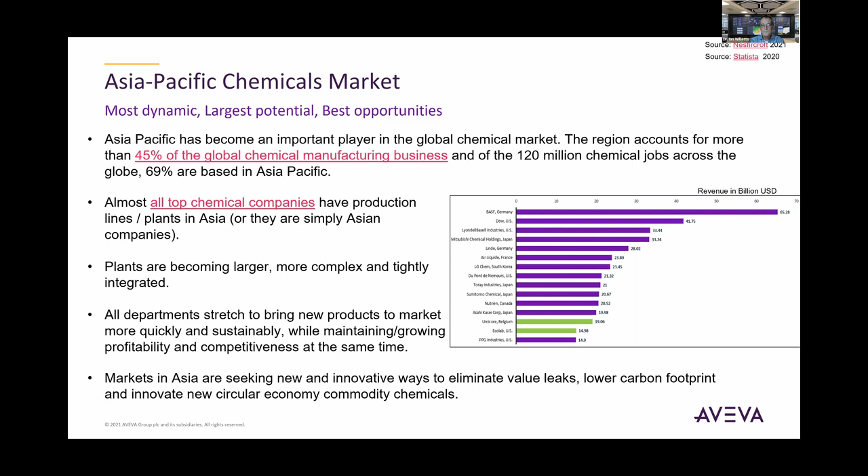If we look at how the industry is responding to climate change and to the need for more reusable and cleaner chemicals, we see three major transitions happening at the same time: first, the circular economy drivers; second, the energy transition; and third, a large workforce transition. I'm going to use these three themes during this presentation to highlight some of the important ways the industry will be changing in the coming years, and the different technologies that can be applied.

Based on different industry analyst papers, an interesting statistic on this slide is that some analysts estimate that by 2050, nearly 60% of plastics production could be based on reuse and recycling. I attended a similar webinar recently given by Covestro,

which is one of the major polymer manufacturers. The person speaking at the time said that we've had 70 years for the core commodity chemicals that are used today across industry. Those processes were invented 70 years ago, and over the last 70 years we've fine-tuned and optimized them. But we're now in a position with the circular economy that we have to invent new commodity chemicals and bring those to market in a fraction of the time we've had to fine-tune our existing commodity chemicals. So the industry is doing a lot of research and development at the moment, innovating new polymers, new chemicals, new circular economy chemicals.

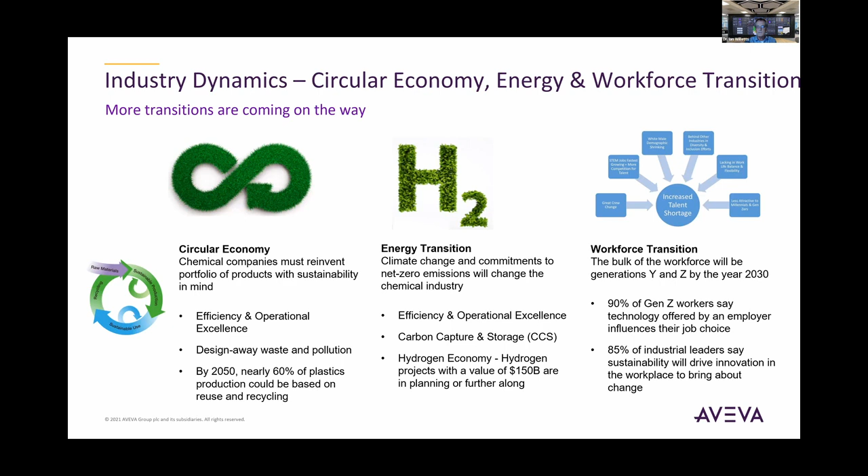So in terms of addressing those three industry challenges, I think there are four areas where we will see a large amount of drive from the industry. Obviously, one is sustainability, and that is meeting the climate challenge.

If we're going to spend $500 billion, or even $1 trillion, we need to make sure that those capital projects get executed a lot more efficiently than they have been in the past. We need to drive engineering productivity. We need to take the workforce we have today, that is always challenged to do more with less, and dramatically improve engineering productivity. And then we need to address the workforce transition.

So in terms of that, perhaps I'll quickly focus in on capital project efficiency and engineering productivity, since I've already mentioned workforce transition and sustainability.

If we look at the execution of capital projects in the past, on average there is a 30 to 40% average schedule and budget overrun on capital projects. Now if you do a quick 30 to 40% calculation on $1 trillion, you don't need to be a math wizard to figure out that that's hundreds of billions of dollars. So we need to drive capital project efficiency and look for ways to do that.

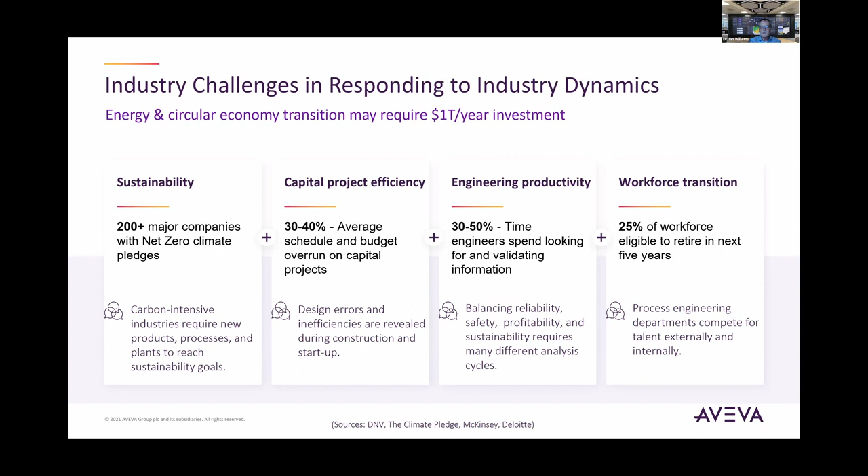And that is combined with the digital twin - those technologies come together with the digital twin, and I'm going to say a little bit more about the digital twin shortly. So Industry 4.0 plus the digital twin is driving digital transformation. Just so we're all on the same page, digital transformation is the confluence of tools, work processes, and people, bringing those three circles together to drive improved productivity, project capital efficiency, workforce transition, and new sustainable technologies that will improve the world.

So in terms of the 4 pillars I've focused on so far, if we work smarter with digital transformation, we can design and implement the sustainable plants of the future, whether it's oil and gas or chemicals.

For sustainability, if we do this right as an industry, if we step up to the plate and implement technology so we can calculate the carbon footprint and environmental impact of a new design, we can make sure that design is as efficient as possible - driving change by not just looking at energy efficiency, but also environmental footprint. So we can achieve a 20% reduction in materials wastage and a 30% improvement in real-time collaboration on sustainable processes.

For capital project efficiency, making sure we use the digital twin and a simulation model early on in the project lifecycle can have a dramatic impact on the final completion of a capital project. The earlier we identify design issues and challenges, the cheaper it is to actually make corrections to those mistakes.

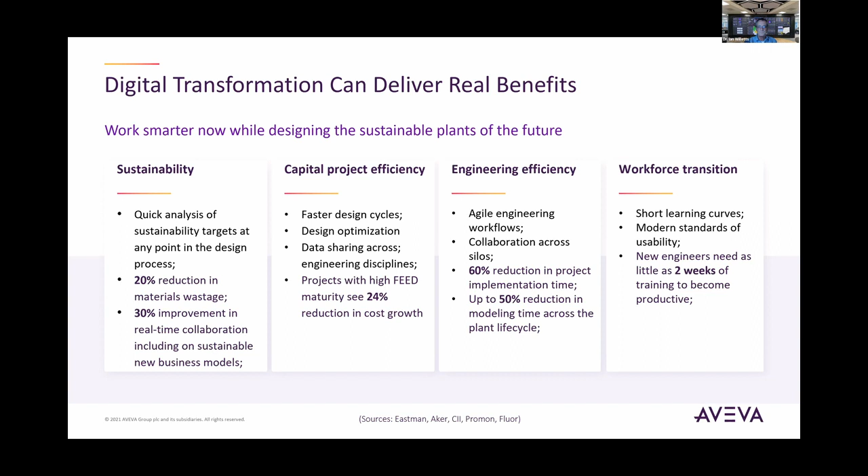So how is AVEVA bringing value to the table? What are the different technologies that we're rolling out in response to this drive on the part of our customers for digital transformation?

I just want to make sure we're all on the same page when the term digital twin is used frequently by many different people. As a term, it means different things to different people. So I want to give you the perspective that when we talk about the digital twin at AVEVA, we look at it from three pillars.

If we actually look, there is the plant digital twin, which is the process data - all of the data sources, whether it's existing data coming from a PI historian, or the actual design data coming from a new capital project. That data represents what the plant is doing today: how was it designed, what is the valve size, what is the pipe length, etc.

There is also the simulation, the process digital twin, which is the model of the process. This is a first principles or a data-based model that gives the cause and effect relationships on how the plant will behave once built and designed. And then the third pillar is all around visualizing or accessing the data.

So it's essentially, how do you visualize the data in the plant and also the results? And how do you derive insight and knowledge from the process digital twin and make that information available to the connected worker? So collaboration, learning, and guidance is all pulled together by the digital twin.

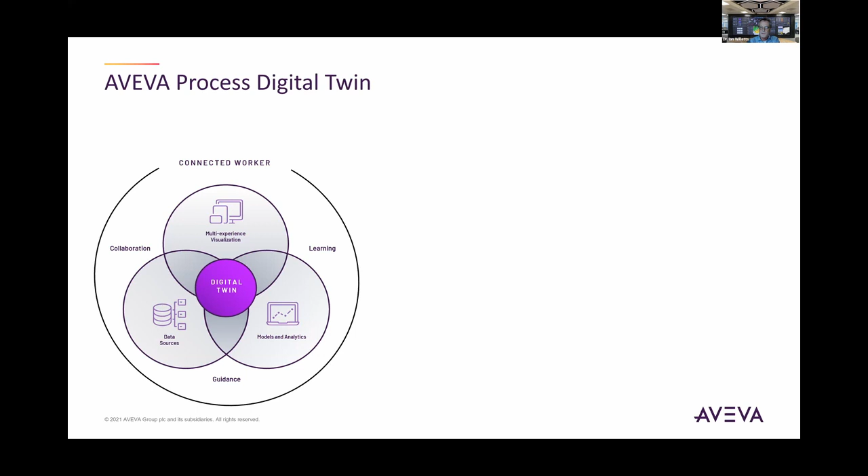Today we're going to be talking about the process digital twin, which at AVEVA we look at from two angles: there are physics-driven models, or first principles models, and then data-driven or empirical AI models. We're tackling this from many different aspects.

There are steady state models, dynamic models, models for the pipelines, the utilities, planning and scheduling models, online models for performance monitoring and real-time optimization. These can be combined with neural net models, AI models, deep reinforcement learning, etc., to combine the best of both worlds and make sure we have the best possible model representation of a process. And that is all geared towards driving digital transformation.

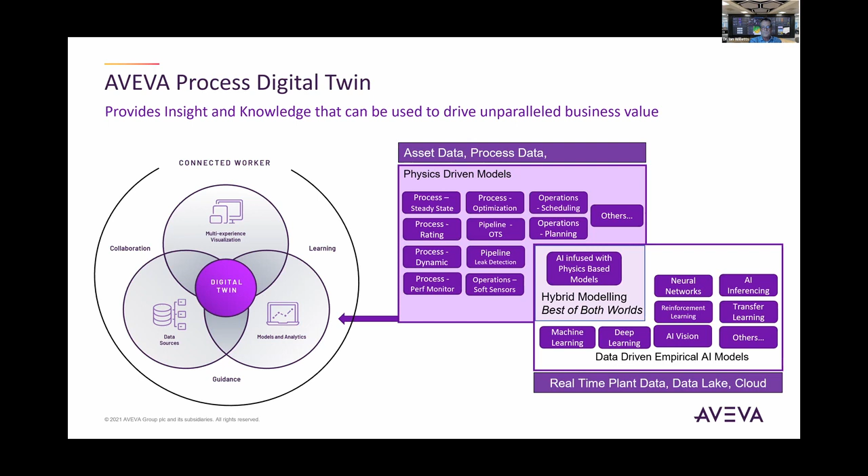So the way that we've tackled this at AVEVA is that we've taken a step back. We are an established simulation company. We've been in business delivering simulation software to companies for 50 years. But we took a step back and we looked at the chemical industry.

We looked at the energy transition that's going to go on as part of a response to climate change. And we've designed a new platform from the ground up that is using the very latest technologies. This platform is called AVEVA Process Simulation. It has been designed from the ground up to be multi-core, cloud ready, with a role-based user interface, and completely open, scalable, and customizable to your particular process.

So we wrote the code from scratch. This is not a rework of an existing product. And it's been designed to deliver the process digital twin for the chemical industry and the renewables world. And it runs in different run modes: design, rating, and dynamic mode.

There are multiple libraries for process intensification, for environmental impact, for economic impact. It is completely AI enabled, and we can have one single process model for the entire asset life cycle across all the different engineering disciplines involved in a capital project.

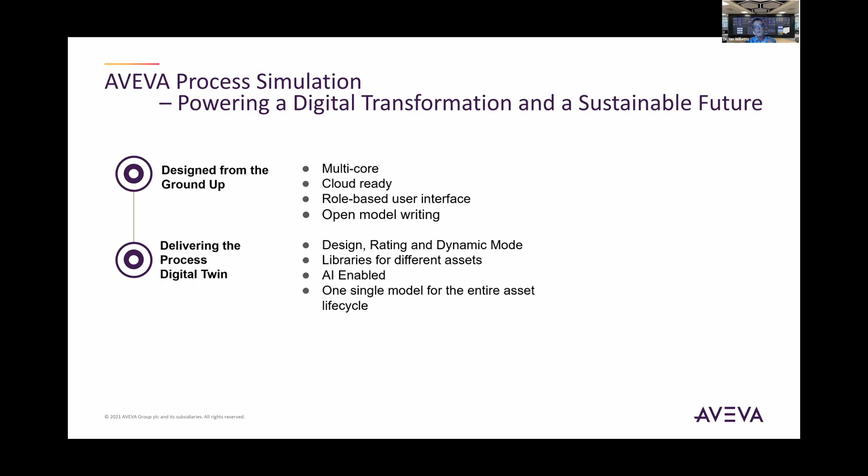And most importantly, it's been designed to be used by the next generation of process engineers, the so-called Gen X, Gen Y, and I think we're even up to Gen Z now. So it's got groundbreaking ease of use, instantaneous results, an intuitive user interface. It's ready to meet the demands of the chemical industry, and it's ready to future-proof the environment with sustainable solutions. And most importantly, easy to learn and use.

At some recent work done at Cal Poly Pomona in California, the professor presented and ran through some coursework with 3 different simulators, 2 established simulators and AVEVA Process Simulation, challenged the students to do some coursework, and then got feedback on those 3 different simulators. Of the class size of 33, 31 out of 33 reported back that AVEVA Process Simulation was completely better, completely new, a much better environment for doing their process engineering calculations. So that was a very positive reinforcement from a local university and from our next generation of workforce.

So to keep this moving, I'm not going to spend too much time on some of these individual features, but we have this new AVEVA Process Simulation, a next generation solution that builds upon what I just said about being designed from the ground up for the next generation of workers.

A key part of today's presentation is around sustainability, and I will play a video that shows some of the capabilities of AVEVA Process Simulation and how it can be used to drive a more sustainable future. Hopefully the sound will come across - we tested this before the meeting, so I'm confident it will work.

This is an example of a cumene production process that's included as a standard example with AVEVA Process Simulation. As you can see, it's a complex process with many waste, utility, product, and raw material streams. Because of that, it's a great example of the type of process we'd want to calculate sustainability metrics for.

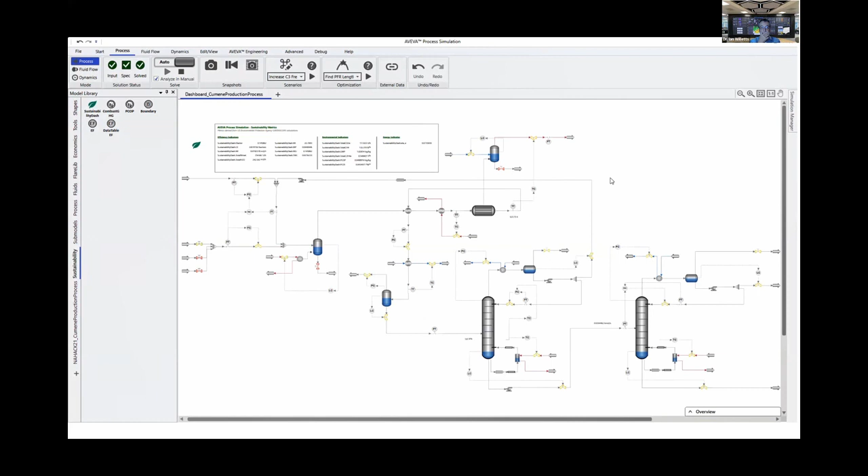As part of our proof of concept design, we've added 16 new sustainability metrics to this simulation. These are calculated in a new sustainability dashboard model within AVEVA Process Simulation. We've added efficiency indicators like the environmental factor, carbon efficiency, and water intensity of the process. There are also new environmental indicators, including the global warming potential, total methane emissions, and photochemical oxidation potential of the process. This new model also calculates the resource energy efficiency.

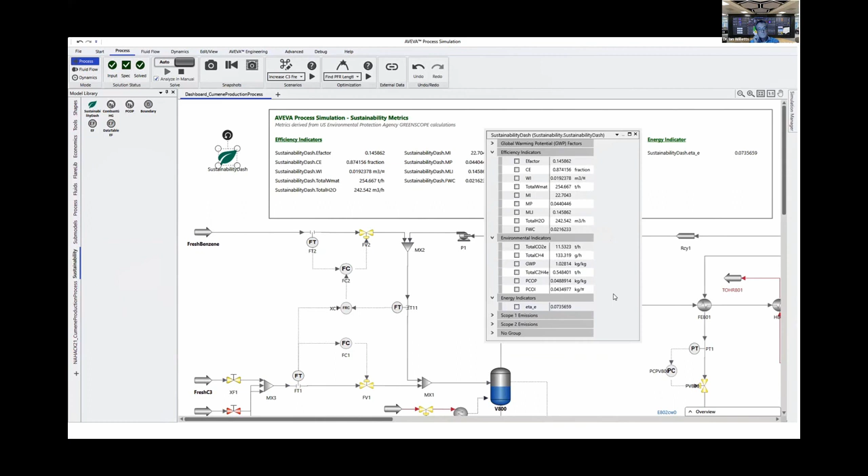With the new sustainability metrics shown here, we can now get the full picture of how sustainable this process is. Other process simulators may have clunky ways of calculating these values from spreadsheets, but those are really difficult to maintain. Our POC includes all these calculations right in AVEVA Process Simulation. This opens doors to process optimization and real-time monitoring that's simply not possible in any other tool.

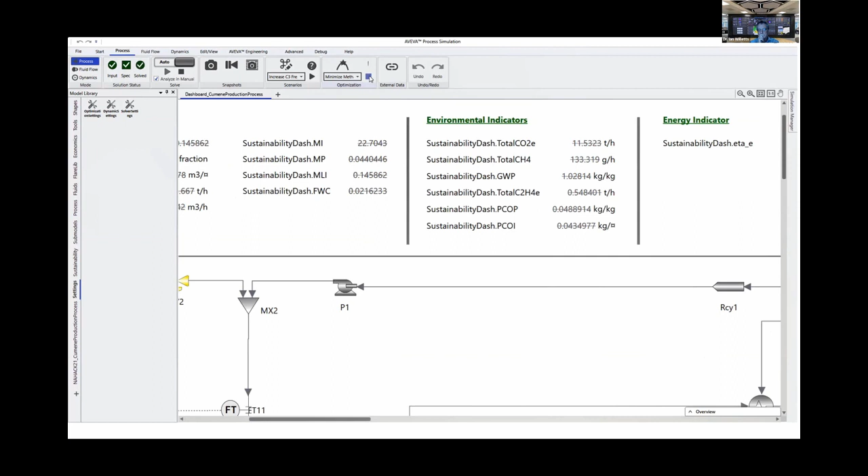As a result, we can optimize the process to improve any of these metrics. For example, we may wish to minimize the methane or CO2 emissions from the process, and we can do this using these new metrics and the built-in optimization features in AVEVA Process Simulation. The final part of this POC is creating a real-time dashboard that our customers can use for advanced visualization of their process sustainability.

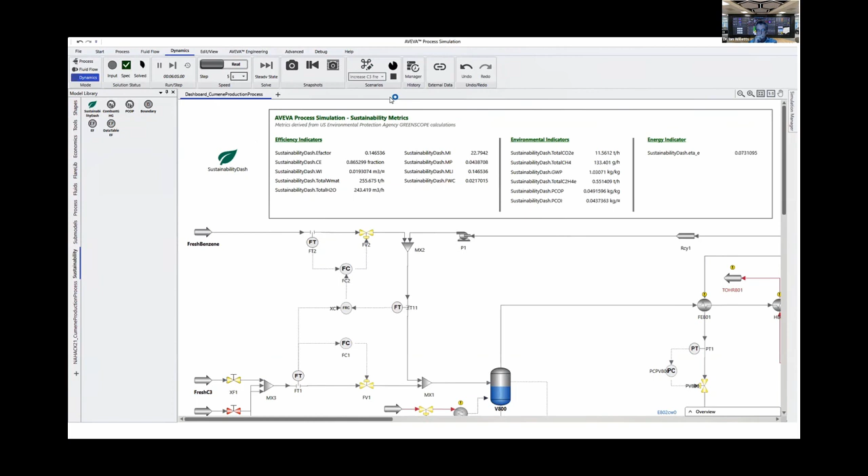Let's switch to dynamics mode now and start running. We'll use this dynamic run to imitate the type of real-time data that we could get from a DCS or through external connections with tools like OSI Pi.

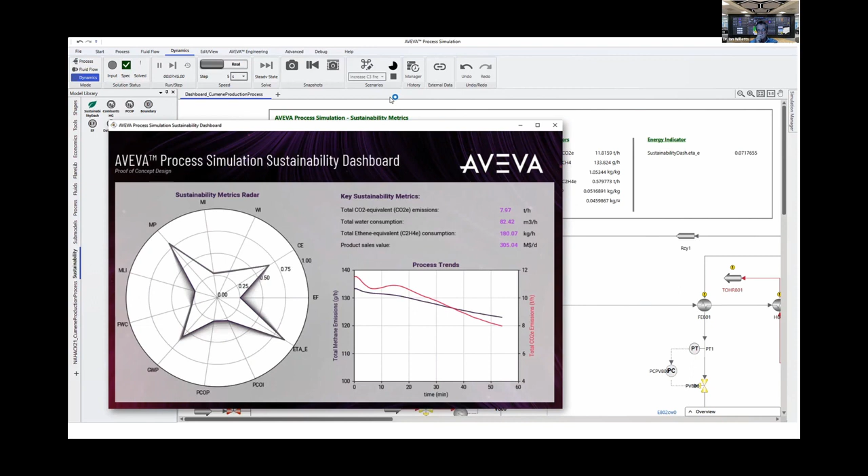On the left of our dashboard, you can see a radar plot with the sustainability metrics we calculated earlier. Notice how the radar plot is changing in real time as the conditions in our plant are changing. On the right, we can see in real time our overall CO2 and methane emissions from the process. This real-time plotting has also been made possible as part of our POC. We want to enable our customers to visualize their sustainability metrics just like they would any other KPI for their process. This dashboard and the real-time reporting really allows for that.

Okay, so again, there's an example of what the software looks like and how we've tackled AVEVA process simulation very much with sustainability front and foremost in the design.

So anyway, the application of AVEVA process simulation can be used throughout the process lifecycle. A model built in AVEVA process simulation can be used at the conceptual design and feed stage. That model then matures for detailed design. The model can then be used to support virtual commissioning and training, online performance monitoring, and even closed loop real-time optimization. I'm going to walk through examples of how our customers are using this software today throughout this process lifecycle.

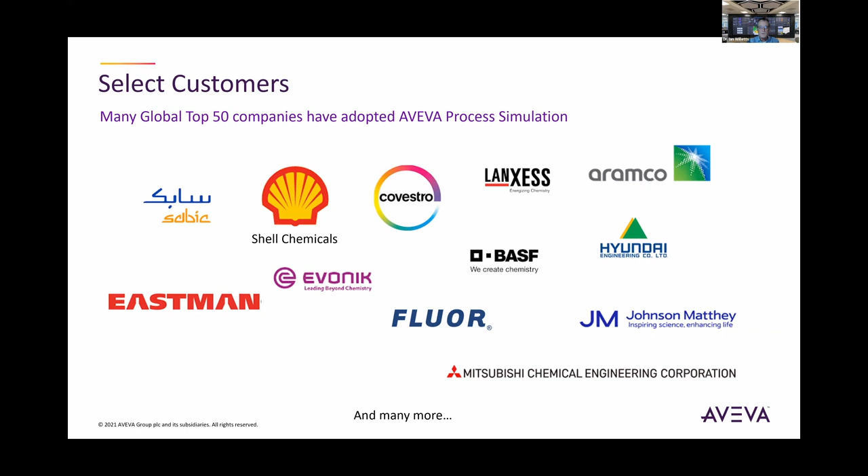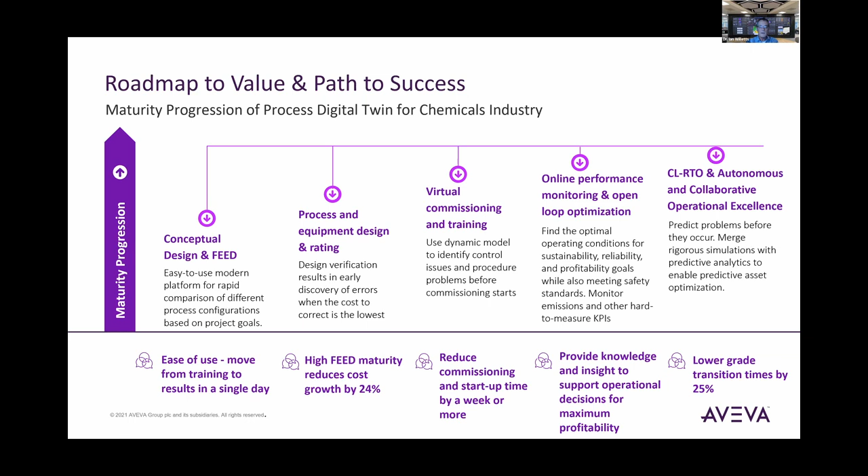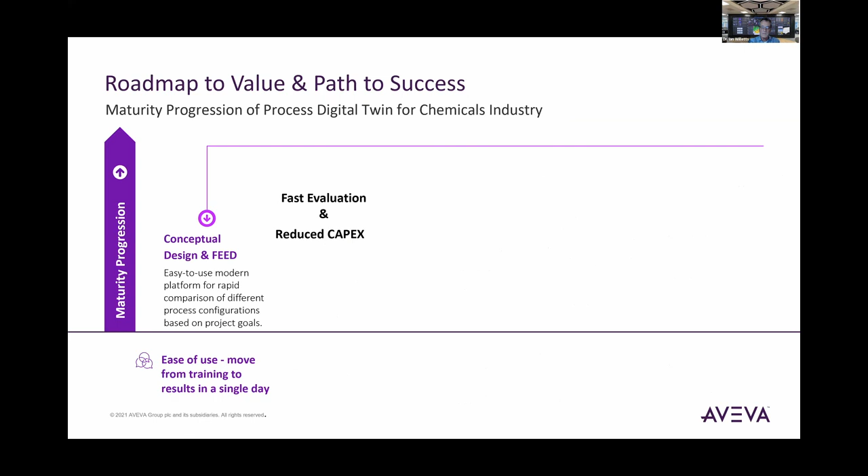I'm going to walk through just very quickly some examples over the next 5 minutes, and then we'll go to the panel discussion. If we look at the conceptual design and FEED stage, it's all around fast evaluation and coming up with a sustainable design at the optimal CapEx investment requirements.

In the video I showed a short while ago, we showed you the sustainability indexes and how we can view those in real time from a performance monitoring perspective. But it can also be used during the design process. As our engineers showed in the video, you can actually optimize for reducing CO2 emissions or methane emissions, given the constraints that you want to make a certain amount of product of a certain product quality.

So we've got the economics library. We can also factor in the economic calculations of CapEx and OpEx. That's built into the software.

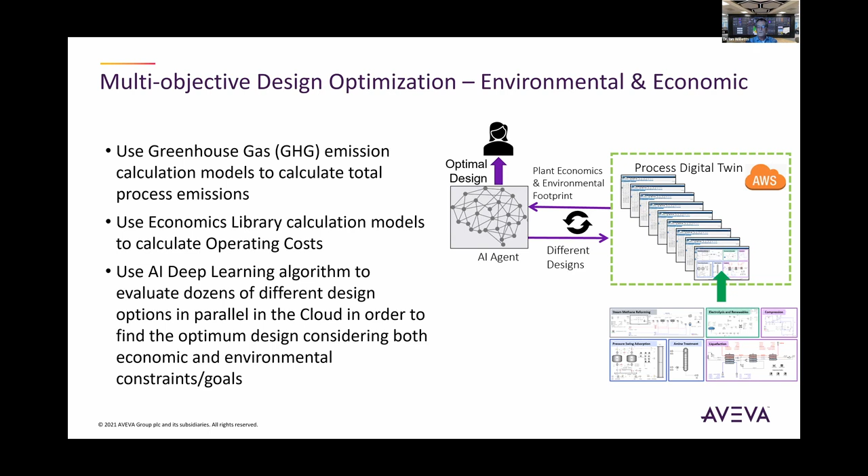And we can also use it with AI models for processes that cannot be modeled. We can actually use an AI agent to do those calculations for us that will do multi-constraint optimization, considering both environmental and economic factors. We have this prototyped at the moment. We have clients actually doing this independent of us with their own AI agents. And we do see this as being a big growth engine going forward, actually using AI to do the design of experiments of new different processes to improve the way that we operate.

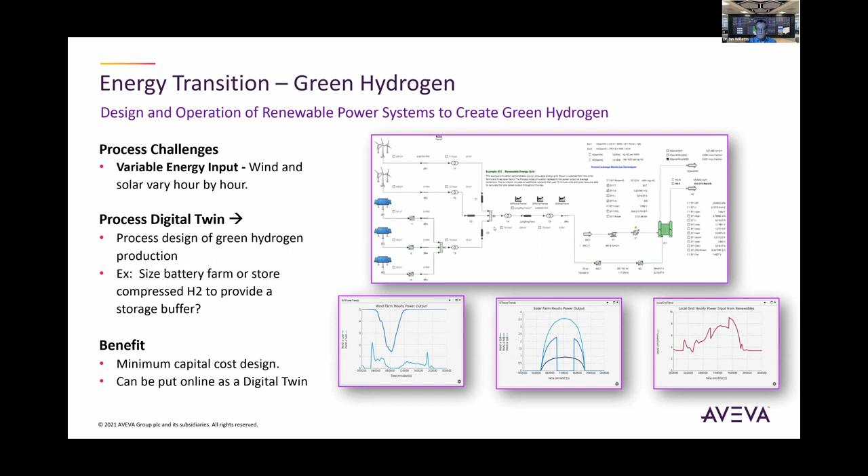Also built into the software is a full renewables library, including wind, solar, power transmission lines, power inverters, electrolyzers, hydrogen liquefaction that operates in steady state. You can look at the impact of wind on solar, the impact of wind on the wind farm, the impact of the diurnal cycle on the solar panels and so forth, and look at the overall dynamic effect on your process.

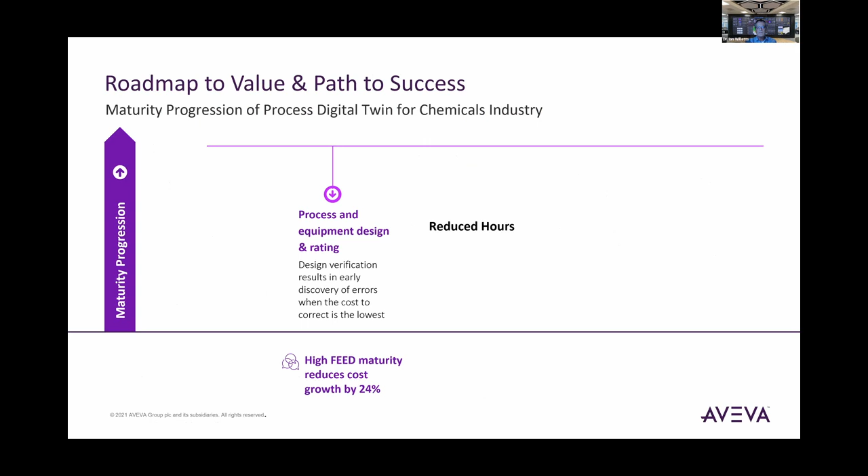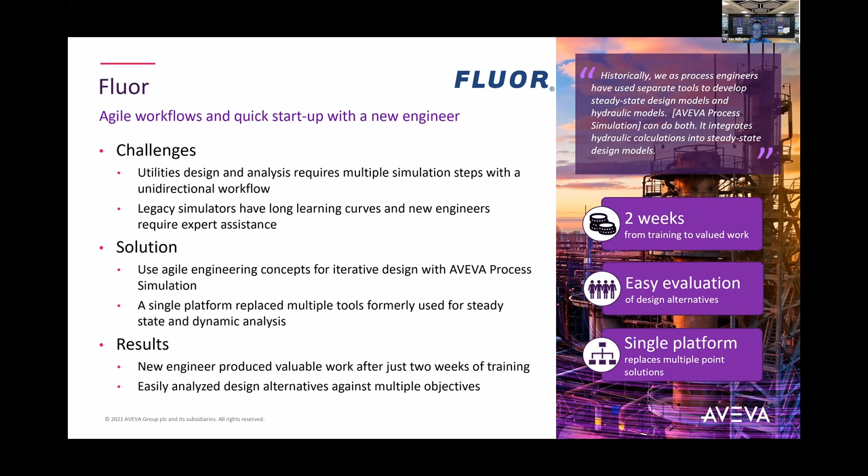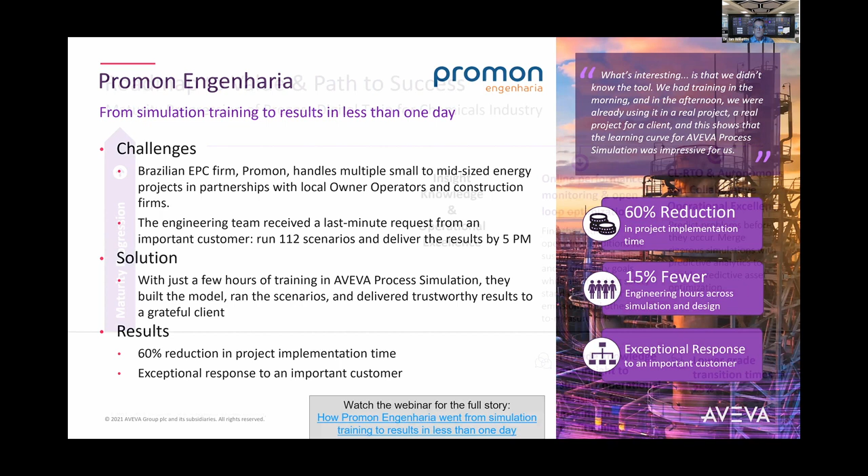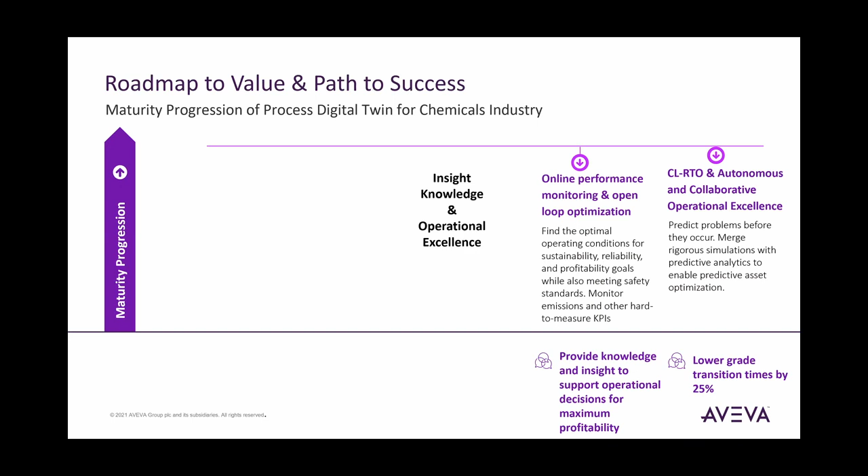As we move through the asset lifecycle, once we move from design into operations, we want to be able to use that same process digital twin in an online mode, for performance monitoring and also for real-time optimization.

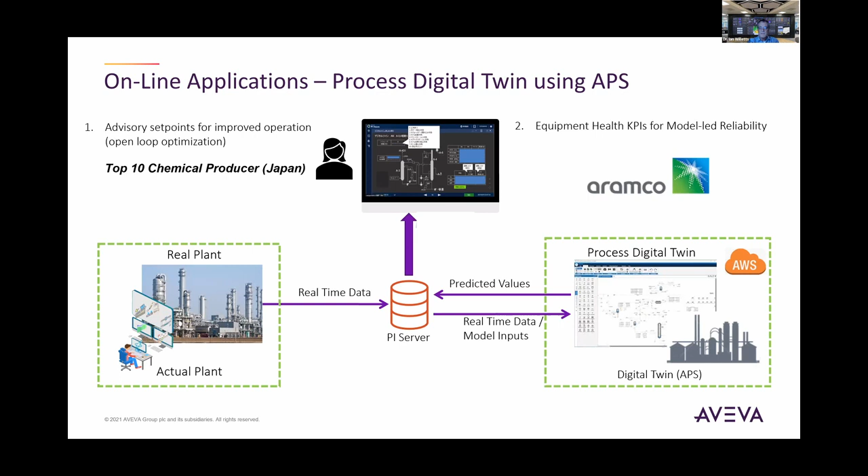So, when it comes to online applications, we take the real plant passing real-time data to a PI server and serving that information up to the customer. But we can interface AVEVA Process Simulation to the PI data server, take real-time data, calculate things such as efficiency factor, global warming potential, and other environmental KPIs, or product quality, pass that information and serve that up to the end customer.

So again, this is a customer - we are in the process of getting their approval to use their logo and their name. But this is a customer that is using AVEVA Process Simulation online today in their acrylonitrile trial plant, very successfully to optimize their utilities, saving hundreds of thousands of dollars a year from putting their design model online for real-time optimization.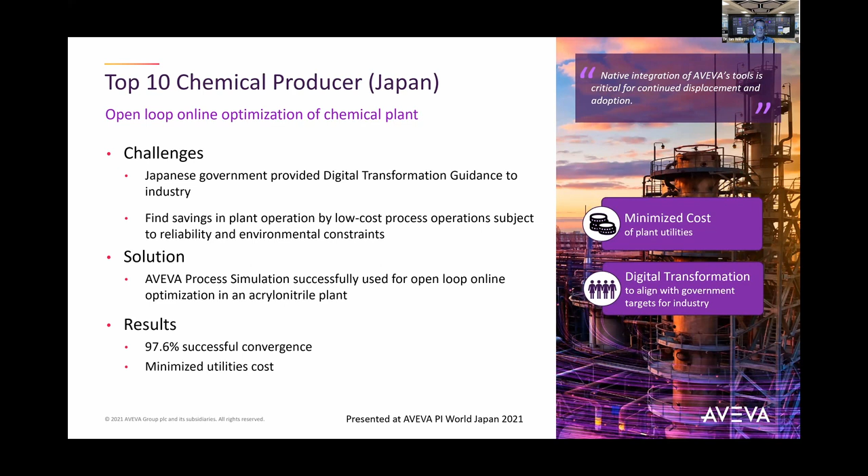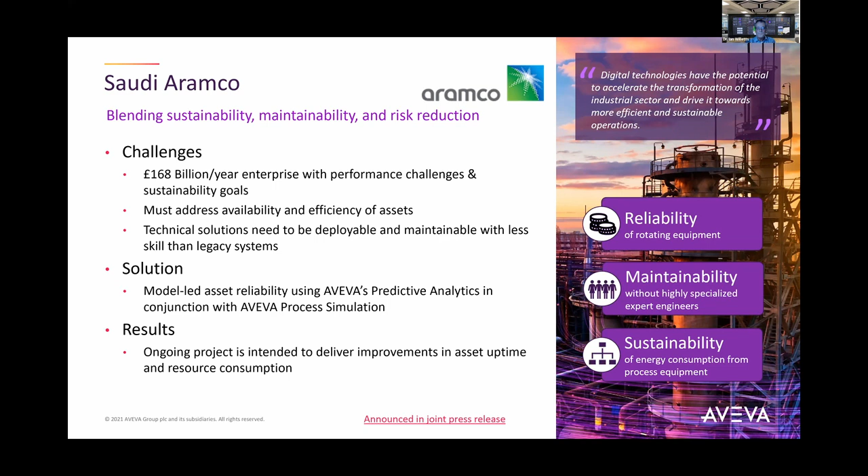So to conclude my presentation - I've probably gone 5 minutes over, apologies for that - basically the industry is facing a lot of challenges from different aspects: from the need for a circular economy, from climate change and the need for new sustainables, and from a workforce transition. We have designed a product here that we're sharing with you today called AVEVA Process Simulation, a next generation solution that can help address these.

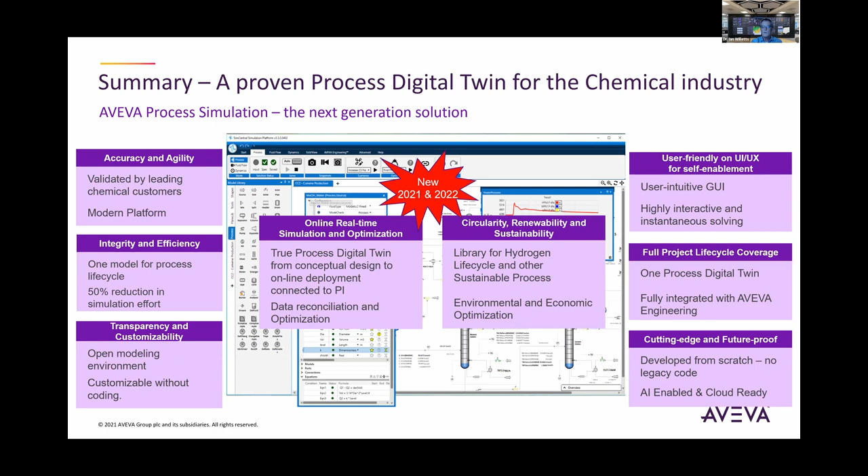And the demonstration, the little video I showed, shows the sustainability library, the economics library. These are all features that have either just been added into the release that went out a couple of weeks ago, or will be coming out in the next release early in 2022. So with that, that concludes my presentation, and I'll hand it back to Pravin.

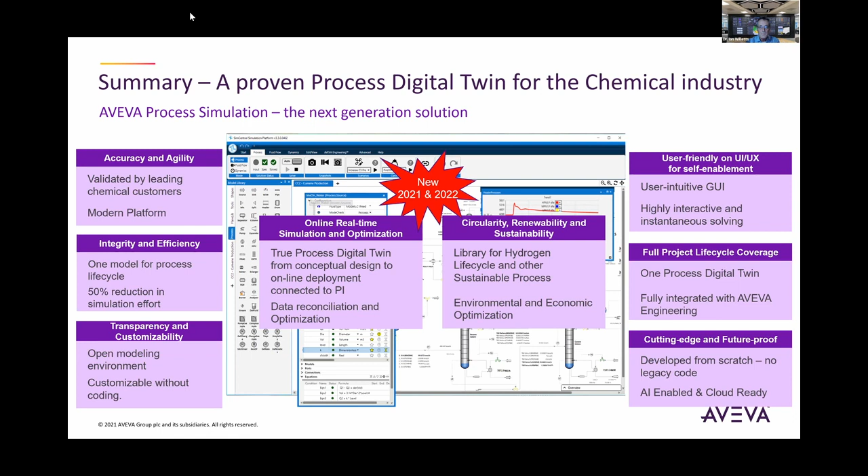Thank you, Dr. Jan Willis. You brought a very interesting perspective of the three transitions: the circular economy, the energy transition, and workforce transition. And you also said that there are more transitions which will happen, which we are not aware about. But these will definitely make a lot of disruptions in the market. With this in the background, now let me open the panel discussion.

And I would ask Mr. Bhaskaran Rajagopalan - sir, what are the challenges and opportunities that you see for the chemical industry, whether in India, whether APAC, or whether global, and how do you see that, sir? Over to Mr. Bhaskaran Rajagopalan.

Yeah, thanks, Prashant. I'm very happy to be here, honored to be here. And I think Dr. Jan Willis set a nice context in terms of what is there for us in terms of process digital twin for the chemical industry.

So if we look out, the chemical sector holds a significant position in the Indian economy, accounting for almost 7% of the GDP and about 14% in the overall index of industrial production. India also ranks 4th in Asia and 6th in the world in terms of chemical sales, which is roughly around 80 USD billion in 2018.